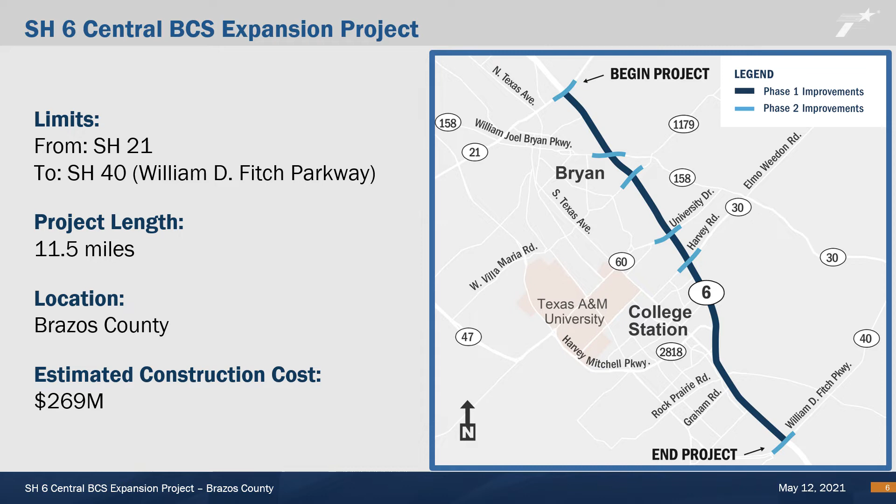The preliminary estimated construction cost is approximately $269 million. The proposed project shown in this presentation is the ultimate configuration. The scope of the project included in Phase 1 and Phase 2 construction may be adjusted pending the final estimated construction cost and available funds.

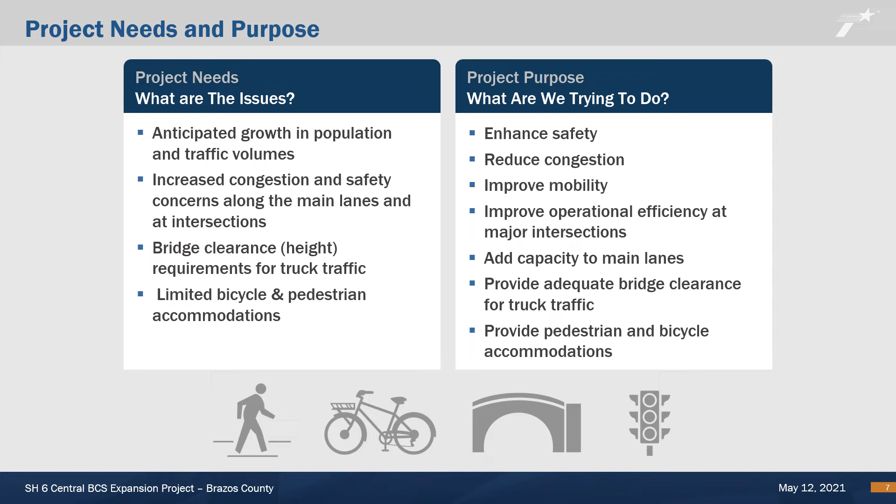The proposed project addresses the following needs: anticipated growth in population and traffic volumes, increased congestion and safety concerns along the State Highway 6 main lanes and major intersections, additional bridge clearance needed to meet truck traffic requirements, and limited bicycle and pedestrian accommodations. The purpose of the proposed project is to enhance safety, reduce congestion, and improve mobility, which will be accomplished by improving the operational efficiency of major intersections, adding capacity to the main lanes of State Highway 6, providing adequate bridge clearance for truck traffic, and providing pedestrian and bicycle accommodations where needed along the corridor.

The public involvement process provides opportunities for property owners, roadway users, the public, and other stakeholders to engage with the project team. This project began in mid-2018 with data collection, analysis of the existing roadway, forecasting of future needs, and environmental evaluations. In December 2019, the first public meeting was held to present the needs and purpose of the project, including the proposed base build improvements and phased construction approach, as well as obtain public input.

Since public meeting number 1, TxDOT has continued to refine the schematic design based on technical analysis and public involvement. This public meeting will present the updated base build improvements, including proposed intersection improvements, as well as how to provide public input, which will be described later in the presentation.

In December 2019, TxDOT heard from many community members at the first public meeting. The greatest amount of participation was received through our online forum. We received thousands of comments and feedback through the online MetroQuest survey and mapping tool, and heard from community members in person at the open house.

From the MetroQuest survey, the most frequent comments received were heavy daily and rush hour congestion, safety concerns with ramps and merging, improvements needed along the frontage roads, improvements needed at intersections and bridges, and the need for walking or biking accommodations along the corridor. The identified needs were evaluated and solutions were incorporated into the project design.

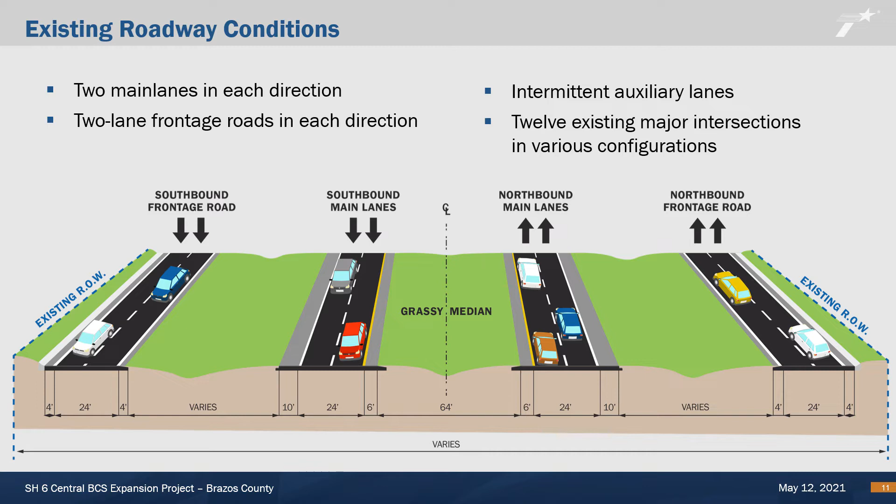State Highway 6 currently has 2 main lanes in each direction and 2-lane frontage roads in each direction. Throughout the corridor, existing auxiliary lanes between ramps facilitate smooth lane changes and merging, but not all auxiliary lanes are continuous. A total of 12 intersections of various configurations exist within the project limits. At present, only limited pedestrian and bicycle accommodations are available along the corridor.

In addition to congestion, a significant number of crashes have occurred along the State Highway 6 corridor. Almost 1,700 crashes and 9 fatalities were recorded along the roadway in just 4 years, from 2014 to 2018. About half of these crashes occurred on the main lanes, and the leading contributing factor was failure to control speed. Studies also indicate that 53% of traffic along the roadway travels less than 2 miles per trip, which means that more than half of the trips within the project limits are for local travel.

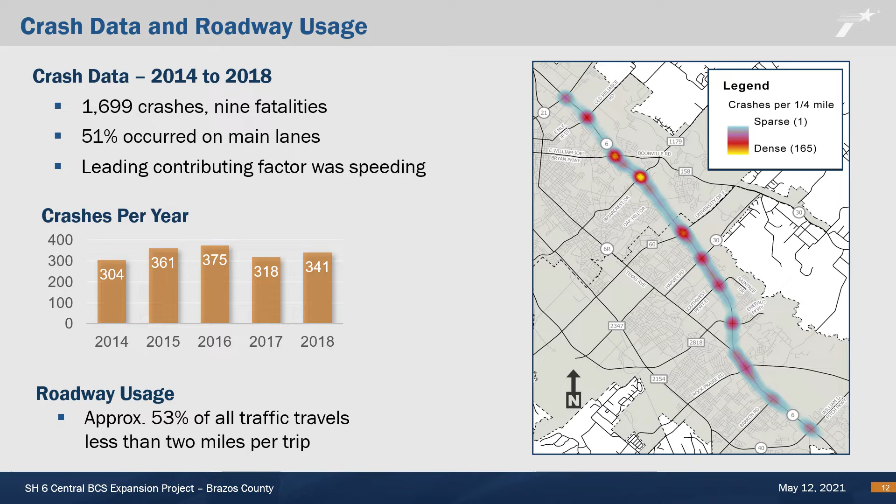The proposed project would be constructed in 2 phases. Phase 1 would be constructed within the existing right-of-way and includes widening the main lanes, frontage road improvements, providing continuous auxiliary lanes between ramps to improve merge conditions, and constructing new collector-distributor lanes at selected locations. Phase 2 includes improvements at major intersections to increase the operational efficiency of traffic flow and construction of shared-use paths for bicycles and pedestrians where needed along the corridor. Right-of-way acquisition will be required to construct Phase 2.

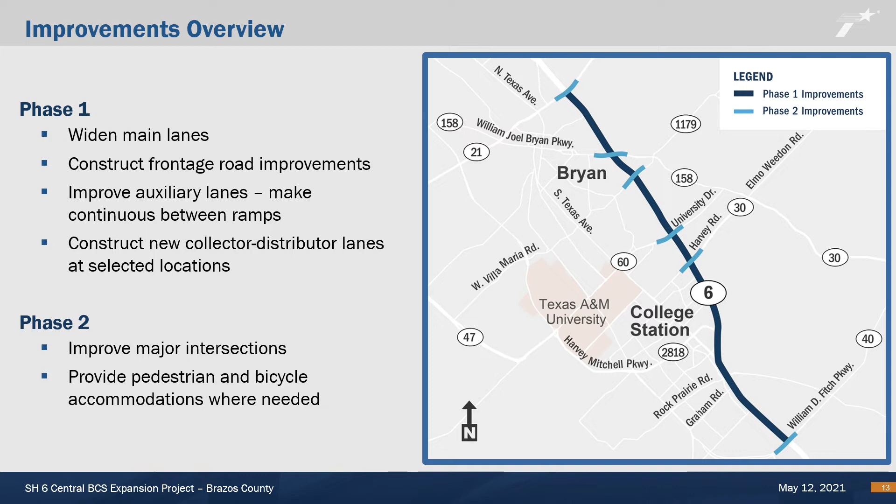Phase 1 improvements primarily include widening the main lanes from 2 lanes to 3 lanes in each direction and improving the frontage roads. In addition, continuous auxiliary lanes and collector-distributor lanes would be constructed at selected locations to improve traffic flow along the State Highway 6 corridor. Each of these features will be presented in the following slides.

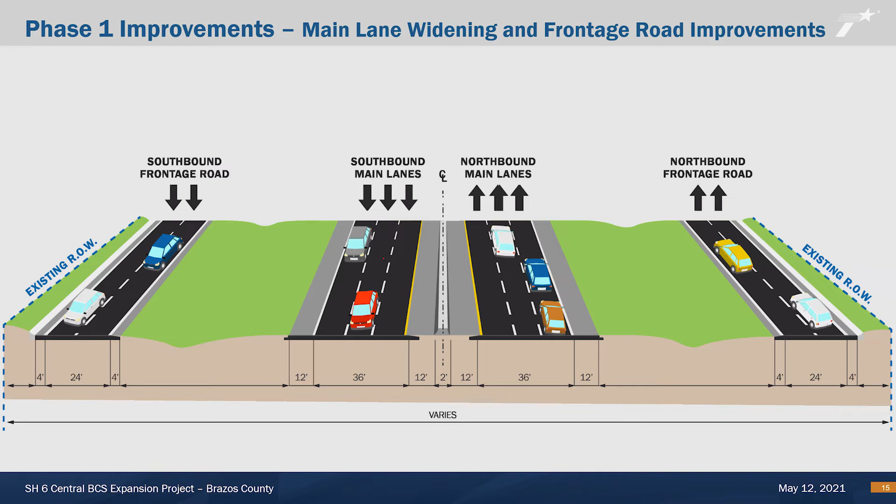Continuous auxiliary lanes would be constructed between entrance and exit ramps along the State Highway 6 corridor. If not already continuous, the existing auxiliary lanes would be reconfigured to be continuous. The resulting longer auxiliary lanes would improve merge conditions for drivers to safely transition from the frontage roads to the main lanes or vice versa. Similarly, continuous auxiliary lanes would also be constructed along the frontage roads to further improve merge conditions.

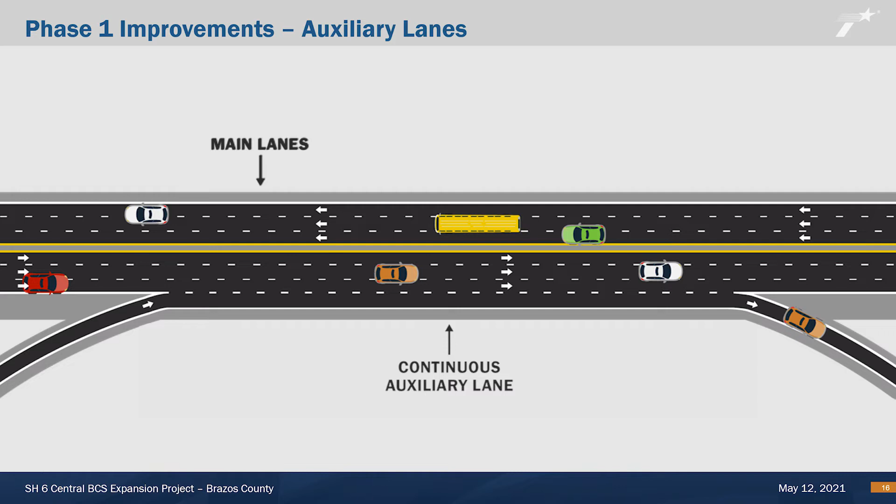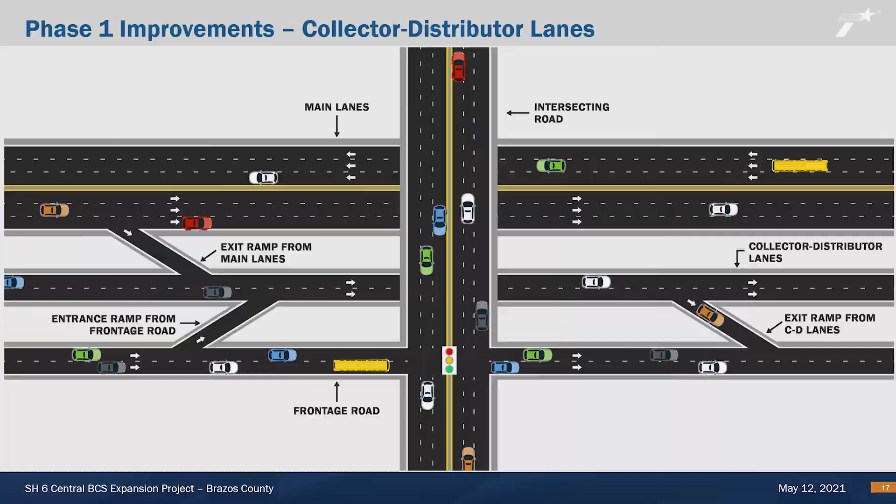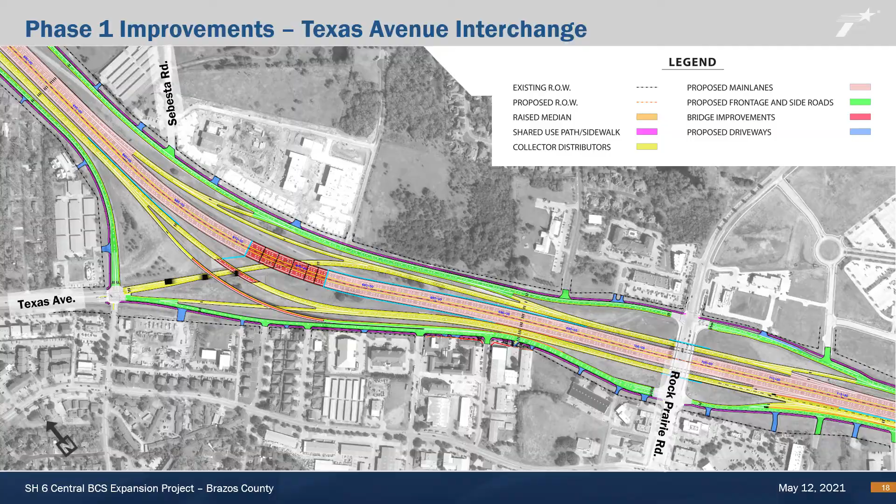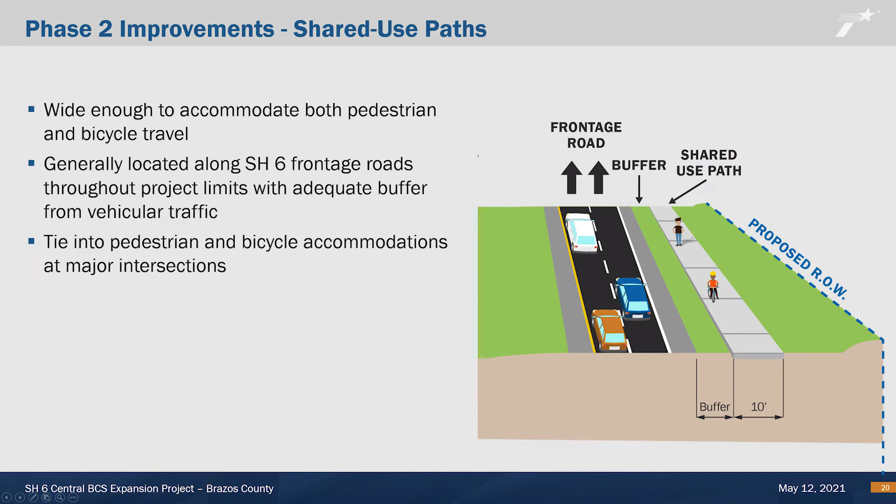Shared use paths at selected locations would be constructed along the State Highway 6 corridor in Phase 2 construction. The shared use paths would generally be located along the frontage roads with a buffer to provide separation from vehicular traffic. In addition, pedestrian and bicycle accommodations would be provided at all intersections and tied into the shared use path along the frontage road. The complete network of pedestrian and bicycle facilities can be viewed in the design schematic for the project at the TxDOT website.

As previously mentioned, the improvements at the Texas Avenue and State Highway 6 interchange will be constructed in Phase 1. Phase 2 construction would include improvements at major intersections along the State Highway 6 corridor. The primary objective of the intersection improvements is to improve their operational efficiency by addressing congestion and safety, as well as providing bicycle and pedestrian accommodations. Each intersection will be discussed in more detail on the following slides.

It is noted that Phase 2 construction would begin prior to the completion of Phase 1. The construction sequence of the Phase 2 intersection improvements would be established during preparation of the detailed construction plans for the project, and efficiently sequenced with Phase 1 construction.

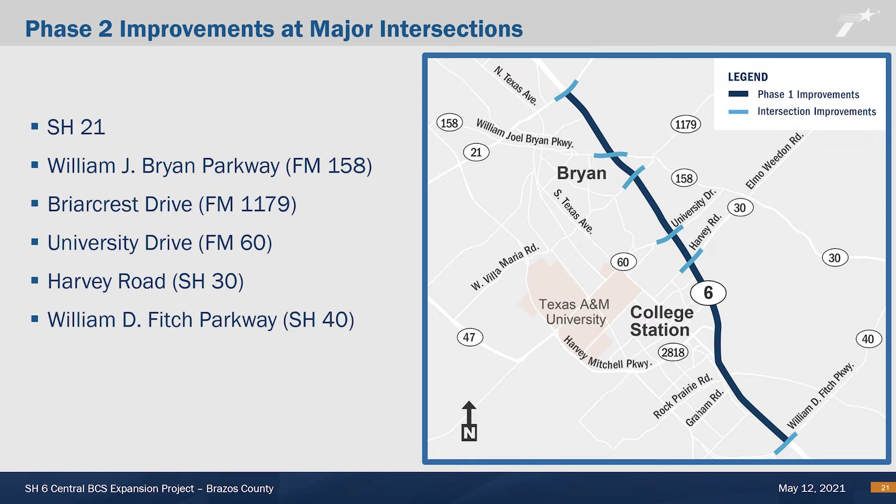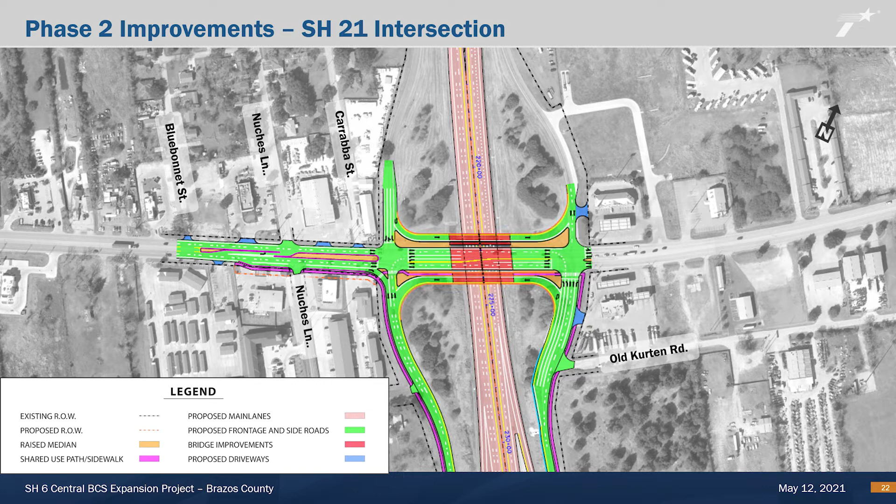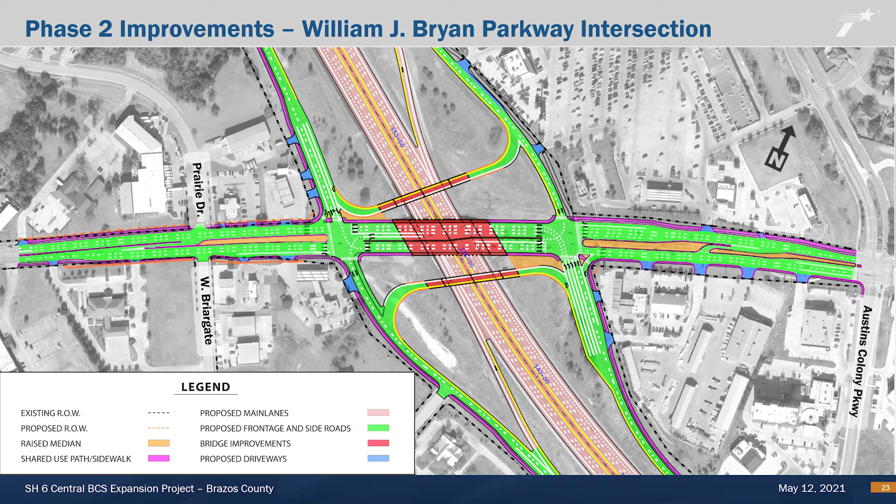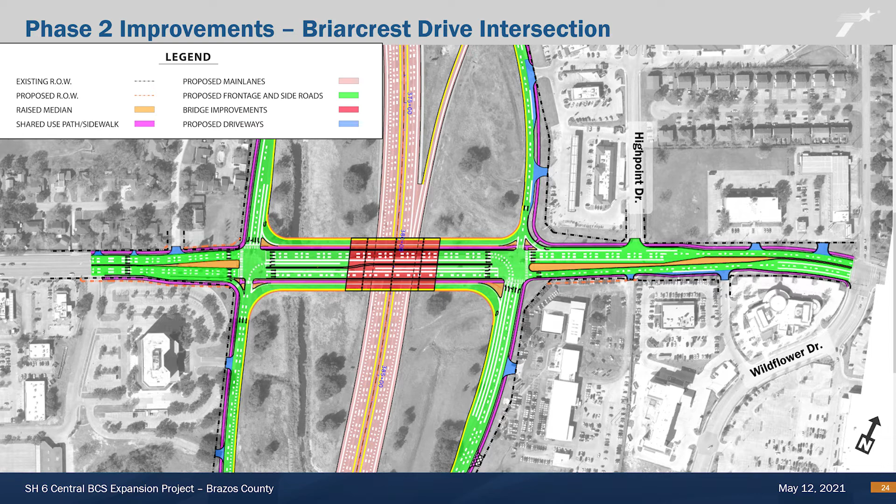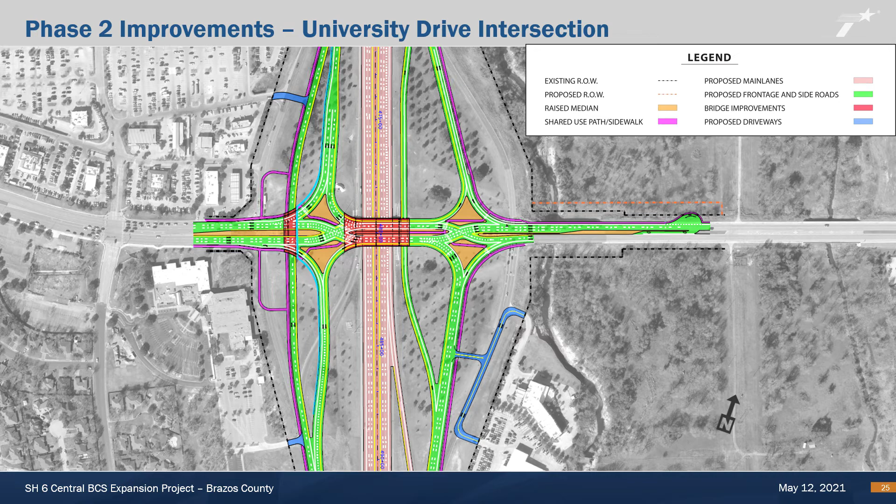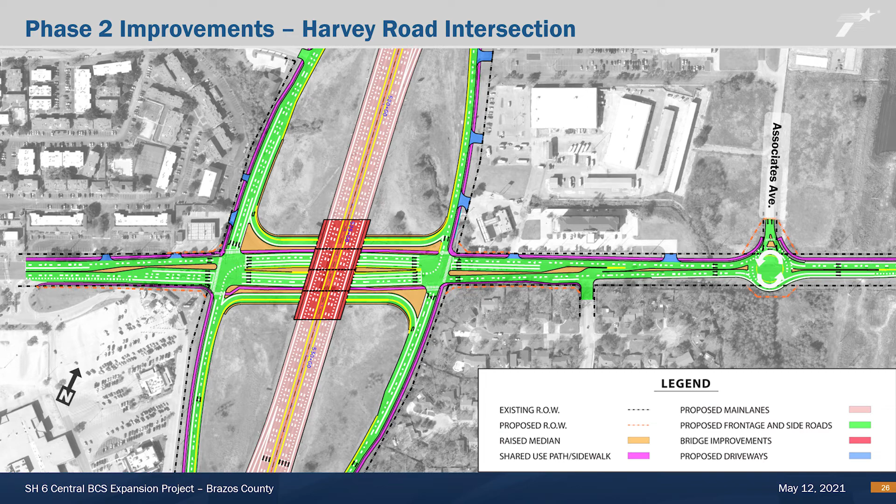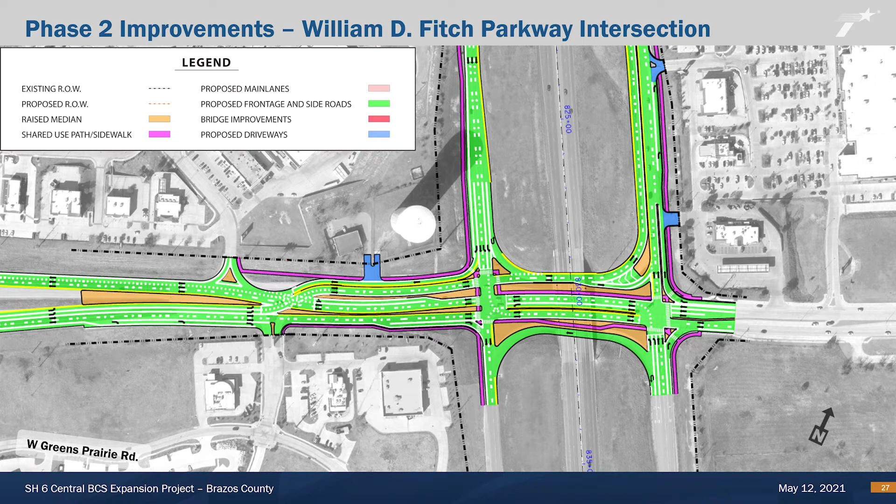The activities for the proposed project following this virtual public meeting include obtaining environmental clearance for the entire project limits, developing the detailed Phase 1 construction plans, and coordination for utility relocation along the corridor. In 2023, TxDOT expects to start Phase 1 construction, which would take approximately 2 to 3 years to complete. The activities after the start of Phase 1 construction include development of detailed Phase 2 construction plans, Phase 2 right-of-way acquisition, and continued coordination for utility relocation along the corridor. In 2025, TxDOT expects to start Phase 2 construction, which could take 2 to 3 years to complete.

Prior to December 16, 2014, the Federal Highway Administration, otherwise known as FHWA, reviewed and approved documents prepared under the National Environmental Policy Act, known as NEPA. However, on December 16, 2014, the Texas Department of Transportation assumed responsibility from the FHWA for reviewing and approving certain assigned NEPA environmental documents. This Memorandum of Understanding was renewed on December 9, 2019. This review and approval process applies to this proposed project.